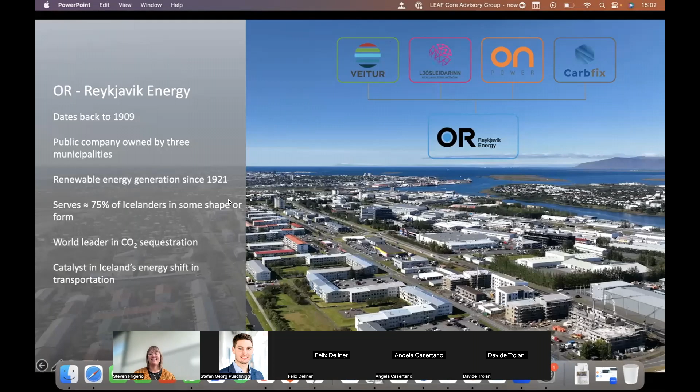Okay, so we connect people and natural resources.

This is just to show the different utilities that we have and the approximate percentage of households served. So we have the water reserves, which is the groundwater, the watershed, and the waterworks and distribution to the homes. It's about 40% of the homes that are served by that.

And as you can see, the blue line continues on through the sewage and out to the ocean. In low temperature geothermal, we have the district heating network serving about 70% of the population, and it goes through the tanks. You've probably seen the tanks below the Pearl, next to the university where we are. And then to heating the homes and industry, and also through the sewage out into the ocean.

In high temperature geothermal, we have the power plants, and they also serve warm water or hot fluid to the district heating network. Hydropower joins in for the electric distribution system. We also have the electric distribution utility, serving about 60% of the population. And last but not least, the fiber optic company, serving 65% of the population.

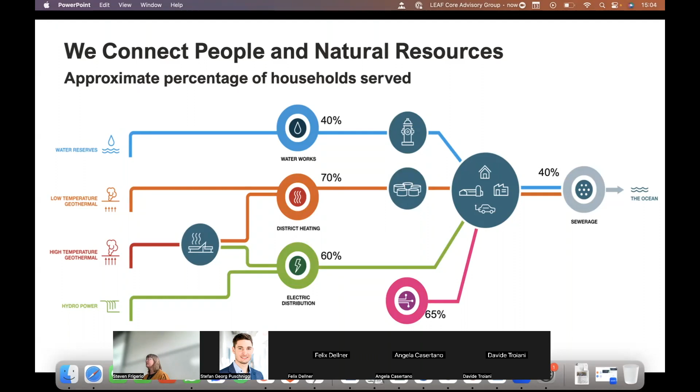Here you see an overview picture of the different systems. The logo marks on the map show where Nesjavellir geothermal power plant and Hellisheiði geothermal power plant are located: 200 megawatt thermal and 300 megawatt electricity in Hellisheiði, 340 megawatt thermal and 120 megawatt electricity in Nesjavellir.

Then we have the district heating network, and there we have 13 separate systems that we are operating, about 10,000 kilometers of pipes. Reykjavik alone has 5,500 liters per second of 84 degree Celsius water. That is, if you recalculate the water to 84 degrees, it's about 5,500 liters per second, or 1 gigawatt thermal.

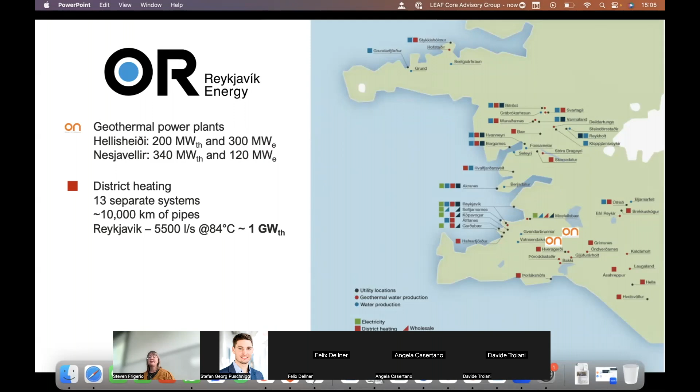And of course, there's also the water distribution system, electricity distribution system, and sewage system. You see the different colors there, and the different colors also within the map, so by that you can see where we are serving what kind of service.

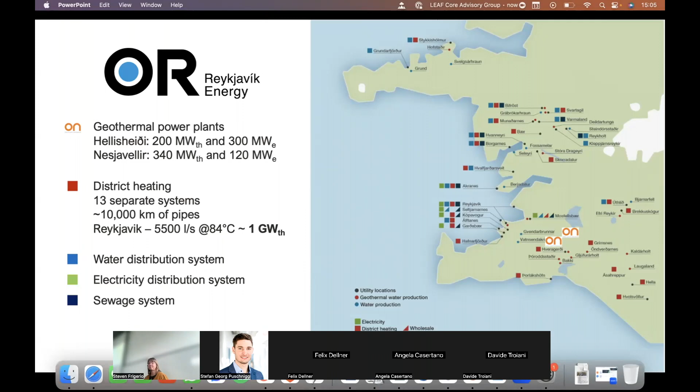So yeah, I'm going to tell you a little bit about the smart meters and how we see the value and the data that it will bring to us. We're currently rolling out the smart meters, and like you saw the map in Lilja's picture, we're not actually capturing the whole area, but this is like where most of the population is.

The green areas are where we've finished replacing the old meters with smart meters, and the rest is going to be finished within the next 2 years. So where we stand in the project right now, in terms of replacing the meters, but we're still not ready with our IT.

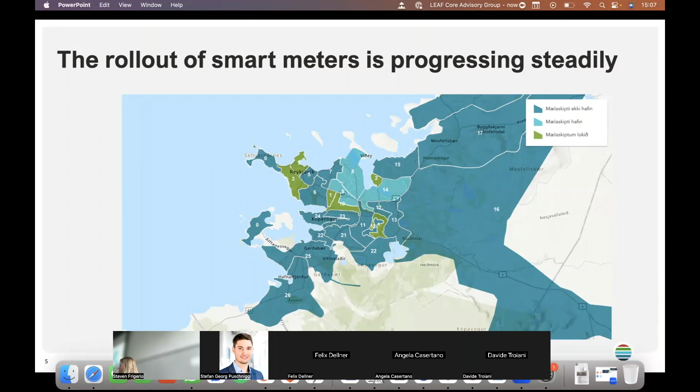The department is basically working on bringing it in-house, the data in real time. Right now we've only been looking at the data with data dumps, but we're super excited, and that's going to happen within the next few months. The timeline is November. So anyway, it's a huge investment, it's a huge project, but we are doing it because we see benefits from it.

And maybe the most obvious benefit for our customers right away is that they will no longer have to submit the readings from the meters to us at least once a year - responsible consumers maybe do it more often. So that's going to be the most obvious change to many to begin with.

But also it's going to change the way we bill our customers. They will be invoiced exactly for what they use each month, instead of the old estimations that we've been using, leading to some corrections at the end of the year. So I think that's going to be a big change.

Also, it creates the opportunity to catch some problems or inconsistencies that you can see in the energy usage, maybe caused by faulty electrical devices. So at the end of the year, you're not going to get a huge bill because you have some problem at your home - you're going to see it right away.

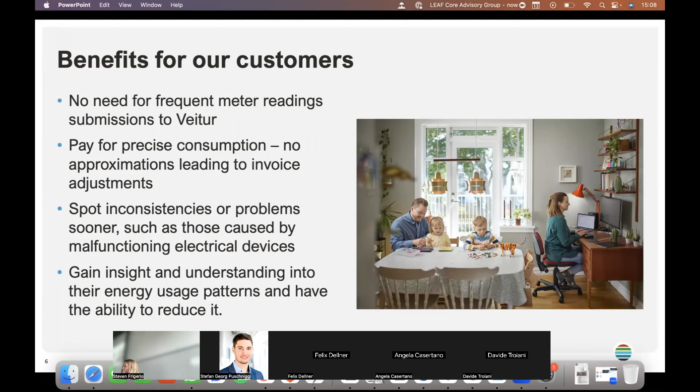But the way we see it, I think the biggest benefit from all of this is that finally our customers will get the opportunity and the tools to really understand how they use their energy. And with that, they can get the ability to change it and change their behavior.

And there are further benefits. Mostly we see that it's going to support our investments, so we can better prioritize the funds that we have to upgrade the system.

With this new data, we're going to get a much clearer picture. During those outages that will, of course, still happen, we foresee that the response is going to be much faster, so we can pinpoint right away and locate where there's a problem. And last but not least, with the smart meter data, we will finally get a very holistic view of the quality of the service we are providing, hopefully a confirmation that we are indeed delivering as we promise.

I'm a woman of simulation models. That's my expertise, and I can proudly say that to realize some of the benefits we hope to get from the smart meter data, we need the simulation models, which we are using currently. But what's going to happen with the smart meter data is that we're going to get much better and more accurate models, and with these models we can get better insights into our systems.

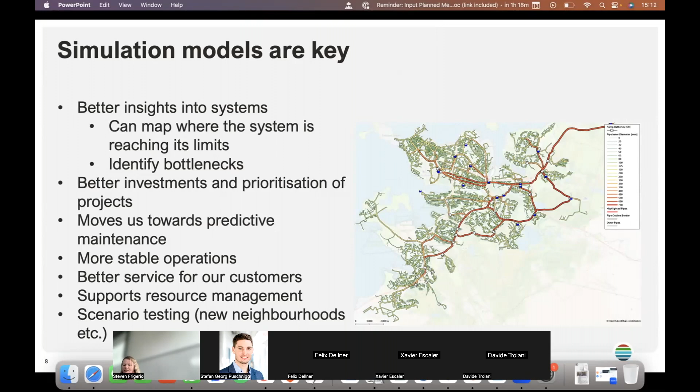With these models, if you have a precise model of your system, you can basically test any scenario you can think of. I'm going to show you one of the bigger projects we've been doing using these simulation models, because we live in a city that is always expanding.

There are many densification areas, putting houses everywhere there is some space, and of course we need to connect these new customers to our systems. These models are helping us enormously to plan ahead, because the city has quite ambitious plans on expanding and getting bigger.

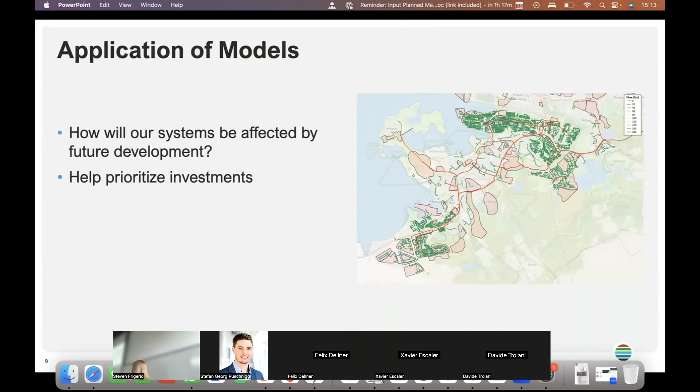So what we did is we went through all the planning data for Reykjavik and the surrounding municipalities, and we located all the new neighborhoods and densification areas of the city. We found out where we're going to be seeing new houses and buildings, and then we converted that into what it means to us, like more demand for electricity, hot water, water, and maybe sewage. But in that system, we're mostly worried about intense rain events.

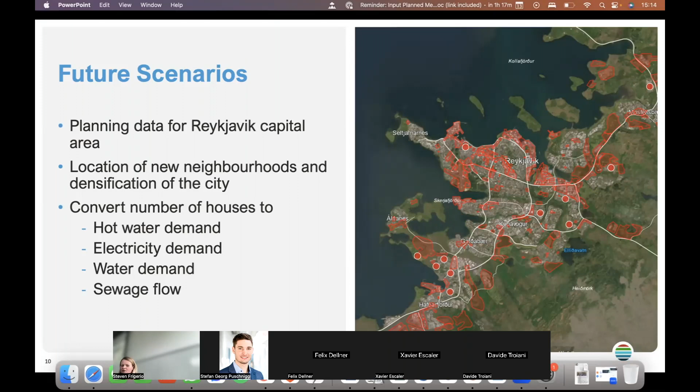So we converted this planning data into the future demand, and we have this planning data like 40 years ahead of us. So with the simulation models, we could have a look and see what's going to happen to our system.

So this is a really nice tool to go into conversation with the municipalities, so we can do this as a team.

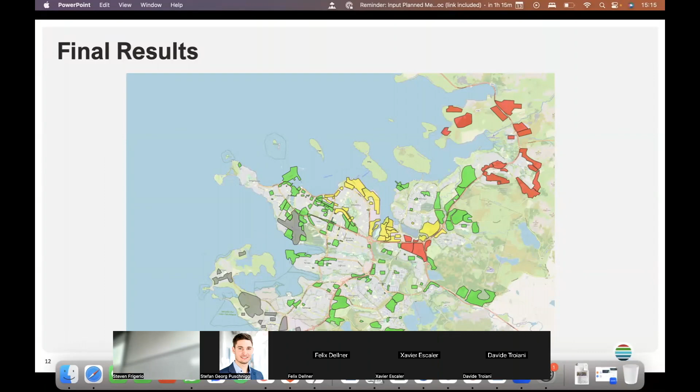And then finally, what I'm super excited about, which is what we're going to do to take these models to the next level, is that we're going to create what we call a digital twin. It's a very much a buzzword these days and everybody has their own definition. Our definition means that it's a real-time model of the system. We've done a small pilot, which we're going to expand during the next weeks.

And when the smart meter data starts rolling in, it's going to be even more reliable. But basically it means that we take the model that we have and connect it with live data, so we can have a look at what's happening in the system at any time.

And this becomes a tool we can deliver to, for instance, our customer call center. Right now they are constantly taking calls - if there's a problem in the system, it's usually the customers who let us know. But we want to be proactive and see things before they happen, before the calls come in, so we could maybe call the customers before. We have very promising results from the pilot, and finally this is also going to be a very useful tool to pinpoint and locate leakages fast.

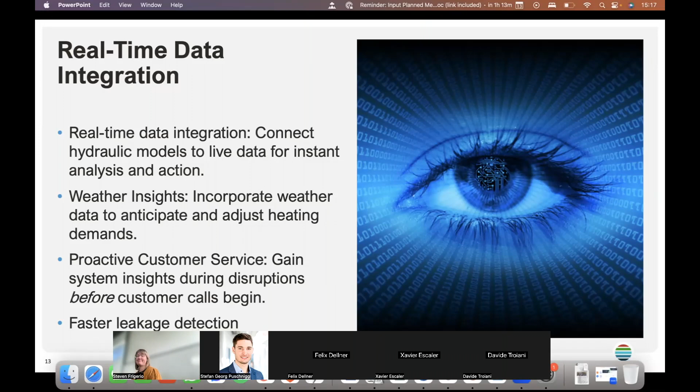And this, of course, sounds like we have the whole world mapped, which is maybe not quite the case. Almost, but almost - so we're heading there. And of course there are some points that we can still improve, and one reason why we are in the H-Hope project is, of course, that.

And we would like to be part of this group that is solving how to meter where we do not have the electricity to meter, for example. And we are now searching for the H-Hope case study within our system.

And we had a lot of discussion with work package leaders within the group on constraints, because of course when you are simulating the real environment within a laboratory environment, you need to have some constraints and some limits. Then after that we had two internal workshops with our main district heating experts and research team that know our system inside and out. And the constraints are not really beneficial for our district heating network, was really the end result.

Because our fluid is hotter than 80 degrees and our pipes are quite slim, we needed to be over 200 millimeters, which they really wanted.

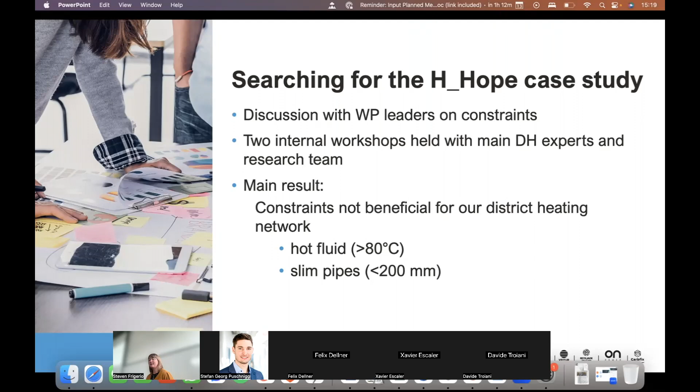But we also continued looking at the system, and this is the system that we are looking at. So water temperature, 80 to 130 degrees, pipe diameter is of course very varying - from 32 to 900 millimeters.

We have the two main veins, so to say, coming from the power plants to the city, from Nesjavellir and Hellisheiði - 24 kilometers of a 900 millimeter pipe with 1500 liters per second from Nesjavellir, and then 19 kilometers of a 900 millimeter pipe with 1050 liters per second. So these are the big veins coming into the city.

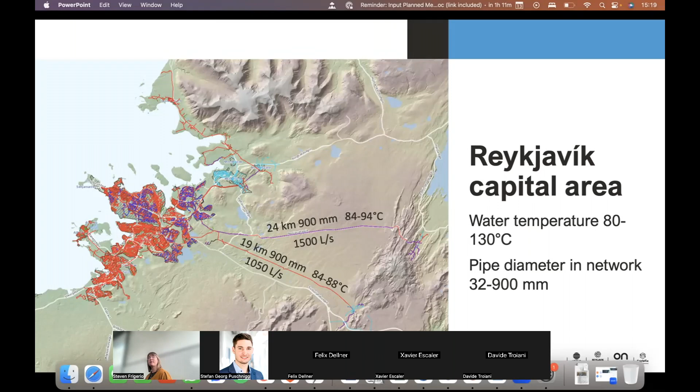And of course that would be the dream, that when we have innovated enough we can have the high temperature solution to have the possibility to also measure them, where today we have to go with meters and measure at specific metering points. But yeah, this is what I was saying.

So most points of interest are well covered at pumping stations, also with access to electricity. And we are undergoing this transition that Sigga described so well, but there the pipes are too slim for the constraints that we were given.

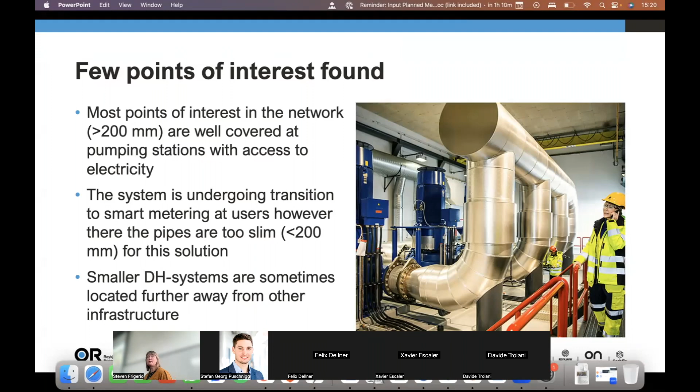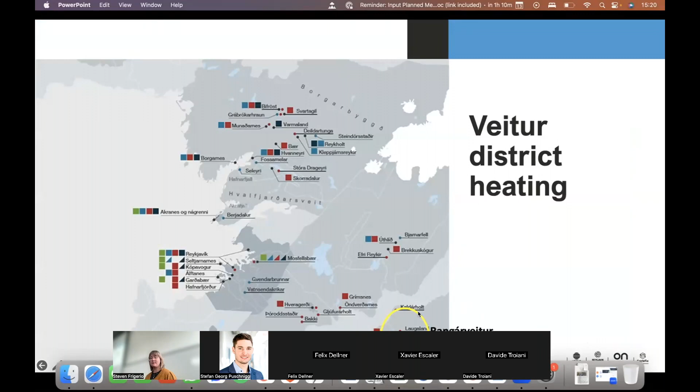But as I showed before, we have more district heating systems than only the capital area, and smaller district heating systems are sometimes located further away from other infrastructure. It cannot be seen because of the border here, but we have a region below that is called Rangárveitur, which is further away from the capital city. But of course it's the midpoint of their world, of course.

And we have Ásaleggur in Rangárveitur, which is a potential point of interest and is the case study that we located as the point of interest for this project, and have provided data from the points where the green arrows are pointing. And the point of interest is where the red arrow is pointing.

So the pipe is 150 millimeters, not quite within the constraints, but as close as we could with the fluid temperature of 65 degrees. There we have the flow rate of 16 to 20 liters per second. And we only have the orifice plate flow meters at the user, so we don't have any data for that point today. If there's a leakage there, we would not know until somebody detected something wrong in the earth or something. So this would be an excellent example of where we could have this kind of metering.

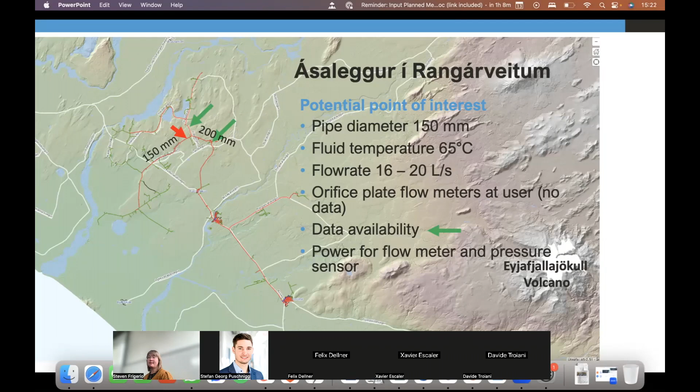Yeah, and then there we would want the power for a flow meter and pressure sensor. So that would be the case study here. But of course, as presented, we don't only have the district heating network, we also have potable water system and sewage system. And within them, we see also further utilization possibilities. So existing springs situated in mountains far from infrastructure.

New springs planned in remote places and pipes under the ocean are examples of places where the groundwater could use some metering. And in the sewage system, we have flow meters and level measurements in the wells, but they are powered by batteries. So that would be also another interesting point.

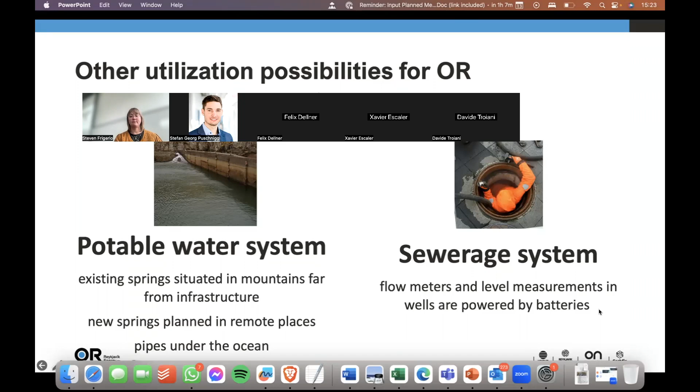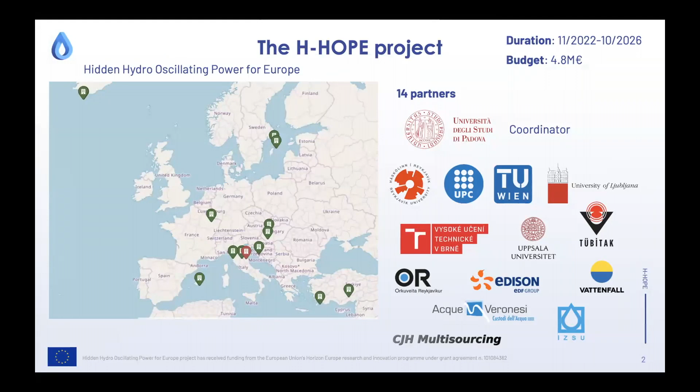Just a few words on the project itself. As you can see, it started in November 2022 with a grant of about 5 million. The consortium is composed of 14 partners, among which there are several universities, but also industries and potential stakeholders. You can find the names over there.

And the main target of the H-HOPE project is to exploit the untapped hydropower potential in natural and artificial water flows. I mean, for example, water distribution network, as we have seen, but also irrigation channels and natural flows like the ones that we have, for example, in the Lagoon of Venice in Italy.

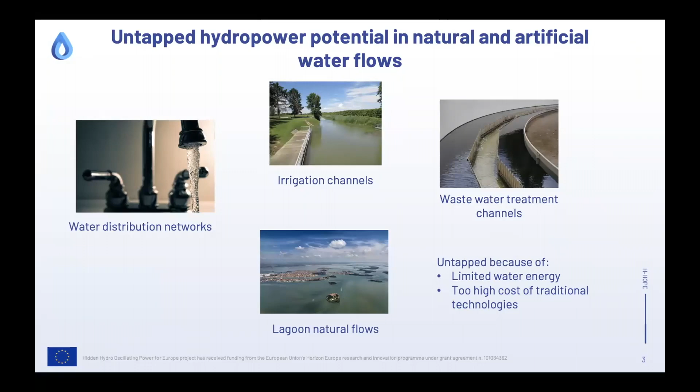This energy is untapped for two main reasons. The first one is that the amount of energy available which can be exploited is limited, and I will show you some data later on. The second aspect is that, because of this limited amount of energy, we cannot use a standard solution like hydraulic turbines, because they cost too much, and this is not sustainable for companies.

So for this reason, we have developed a solution. We are trying to develop an innovative solution whose goal is to be sufficiently efficient, but also low cost. And the concept at the basis of the H-HOPE project is the one that is shown in this figure.

If you immerse a body in a water flow, downstream you create vortexes like the one plotted in this figure. And if these vortexes have the right frequency of shedding and the right intensity, you can produce vibration and forces on the bodies. The result is what we can see in this video: a moving body forced by the water flow, and you can try to extract the energy of the motion of the body. This is the general concept of the H-HOPE project.

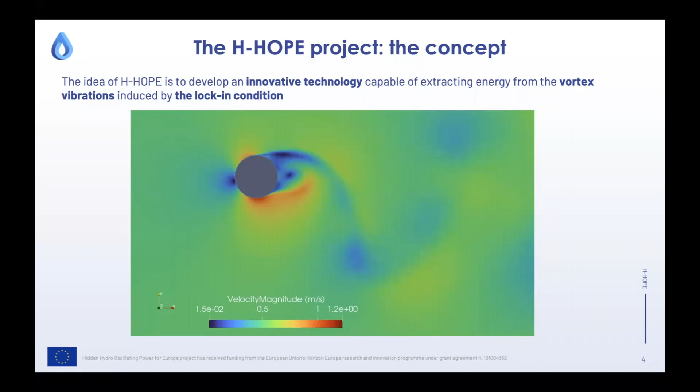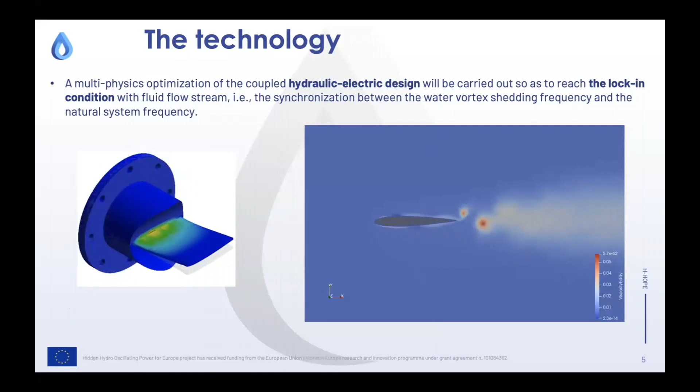Of course, this is complex for several reasons. First of all, we have different application fields, as I mentioned at the beginning of my presentation: water distribution network, wastewater treatment, and natural flows. So we have tried to classify all the possible application fields into three main groups, named piping, open stream, and open channel. Piping is quite easy to understand - we are targeting pipes in hydraulic networks like the ones that we have seen in the presentation before.

Open streams means a situation in which you have a water flow with a specific direction, and you can use also the walls as an installation point for the technology itself. Whereas open channels means a completely open movement of the water, like in natural flows, for example, in the Lagoon of Venice. And for each of these applications, we are trying to identify the most suitable configuration.

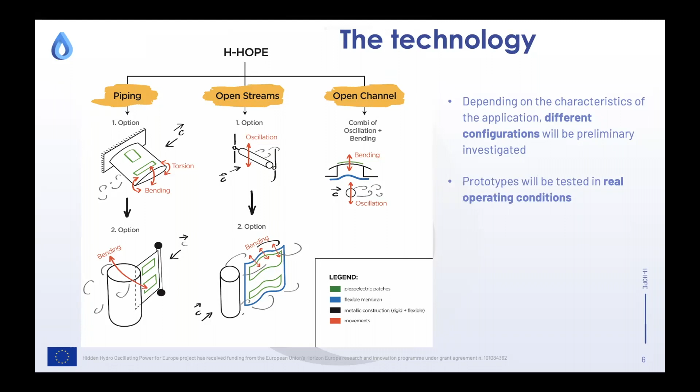There are different options. All these options are under investigation and will be tested in laboratories in real operating conditions. So we need real operating conditions. And for this reason, within our project, we have several case studies which provided us a lot of data.

We have 4 distribution networks in Italy, Austria, Spain, and moreover. We have 1 hot water distribution network, and we have just seen it. And then we have 1 wastewater treatment in Italy, 2 open channel application case studies, and 1 lagoon. Of course, the Lagoon of Venice.

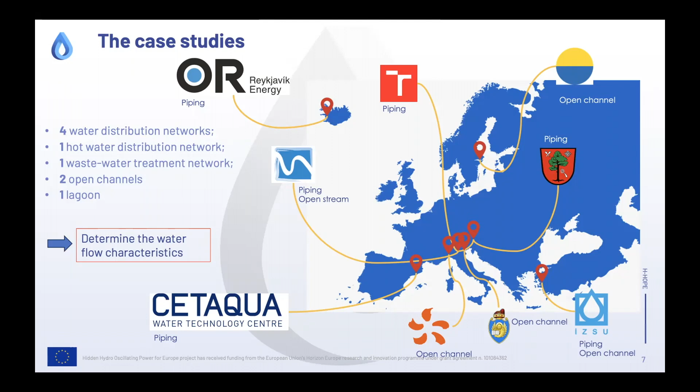One of our activities is to collect as much data as possible from these case studies in order to define the boundary conditions in which our technology will be required to operate. Here are just some examples of the data we have already collected.

For example, in the case of the piping application, we have seen that on average the water flow velocity is between 0.4 and 2 meters per second. We can have different diameters of the pipes. As we have seen, we can go from 200 millimeters up to 2.5 meters of diameter, depending on the application, on the position within the networks.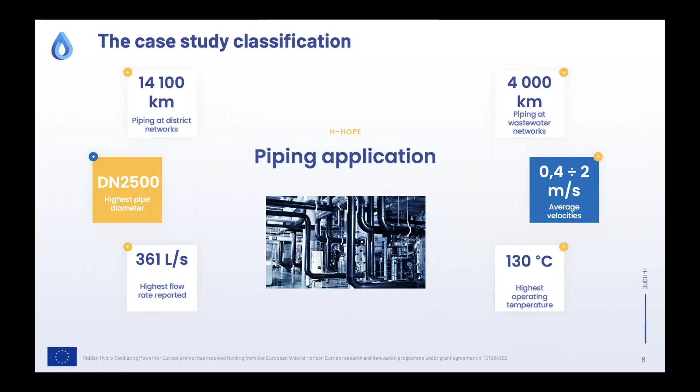There are also challenging operating conditions like the temperature. For example, in the hot water district heating networks, we have an average of 130 degrees, which can pose technical problems like the glue of the patches suffering at the high temperature of the water. So we need this data because it provides us the right technical constraints and drives the research activities in the right direction to make the solution feasible and properly designed for the different application fields.

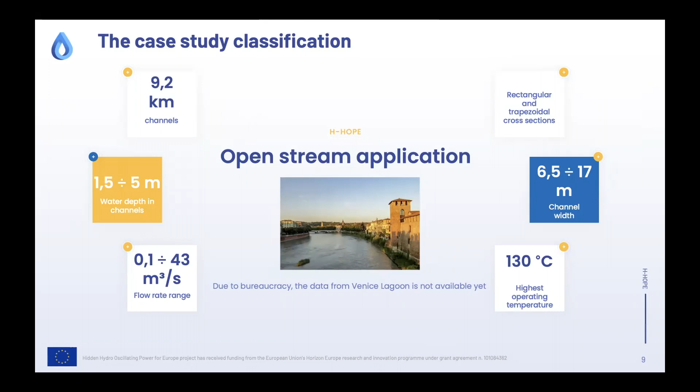Here, some other data about the open stream case studies. As you can see, velocities are changing a bit, dimensions are changing, and dimension is an important constraint because we have moving bodies, and the space around the bodies can create a constraint. In a pipe with 200 millimeters of diameter, the allowed movement of the body is limited because you cannot hit the walls of the pipe. So these are constraints that have to be considered during the design and development of the technology.

Last but not least, open channel application increases a lot the available space. For example, we have ranges going from 6.4 up to 17 meters, which is good in terms of oscillation, but can pose problems in terms of water direction because not always do you know the direction of the water, and you need to develop something that can adapt to a variable direction, not only to a variable water velocity.

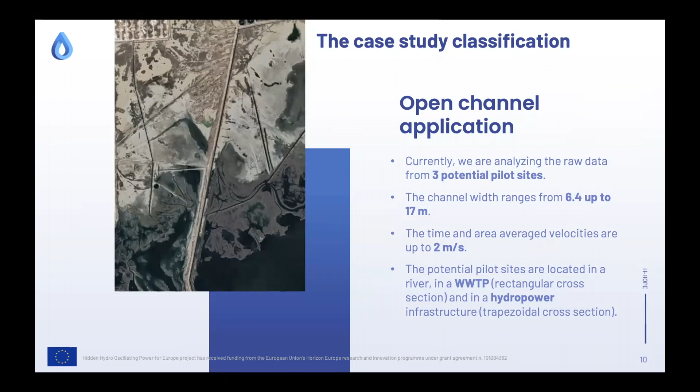So our goal is to produce energy. And to do this, we have to obtain a significant movement of the body. But this movement is obtained only if we are capable of achieving the so-called lock-in condition. The lock-in condition is a phenomenon in which the vibration induced by the water flows, by the vortexes that I have shown before, are perfectly synchronized with the natural frequencies of the body itself, so the natural vibrational modes of the body itself.

You have to synchronize these two behaviors, and you have to synchronize these two elements also with the control system having its own damping factors and its own influence on the system itself. And this is challenging, and it requires a design which is perfectly customized to the water flow characteristics.

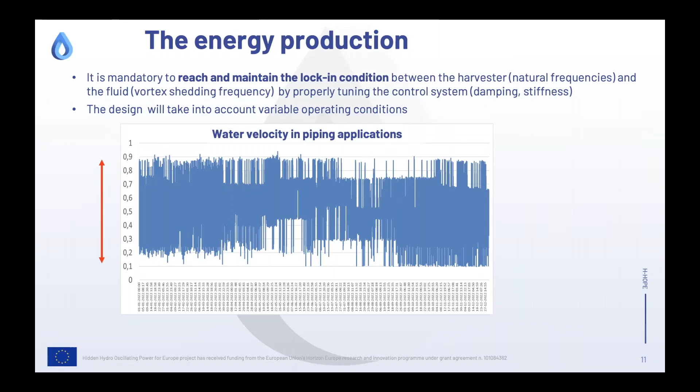This is challenging because we have to find the proper design, the optimal design, to try to maximize energy production. But we have to be aware that our technology will not be able to produce electricity all the time. There will be instants, maybe minutes, in which we will produce energy, and other time ranges in which production will be zero.

We are doing our best to improve this behavior. For example, in terms of control system, we are developing a maximum power point tracking solution, which adapts the damping factor of the control system in order to follow the water flow velocity and adapt the control system to the new operating condition. This allows us to produce energy for a longer period, but we are not fully aware now of how long this period can be. We are studying this.

And the last challenge is the amount of power. If you look at this graph, with the maximum velocity, in this case 0.9 meters per second, a rough estimation of the ideal power that can be extracted from the water is 140 watts. So we are not producing really renewable energy.

This is not our goal. We want to try to extract a little bit of that power in order to feed sensors, to support digitalization of the networks and the case studies under investigation. And we have to be aware and fair from the very beginning that, for example in this case, 140 watts is totally unrealistic. We cannot extract all that amount of power.

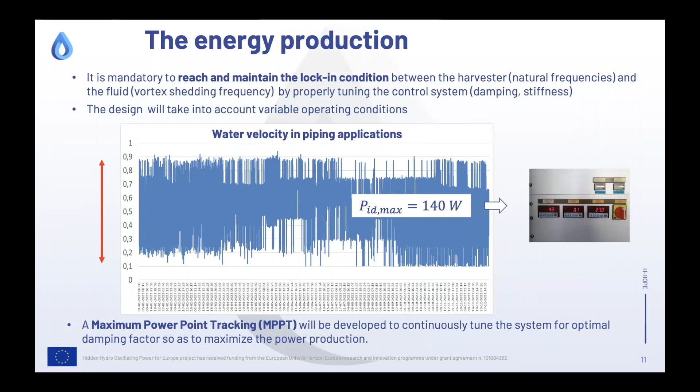The final goal of the project is to make cities and networks more resilient and more environmentally friendly. So we are also, in parallel, carrying out activities in order to assess the environmental impact of our solution, the holistic sustainability of the solution - not only the ecological sustainability, but also the technical and economical sustainability.

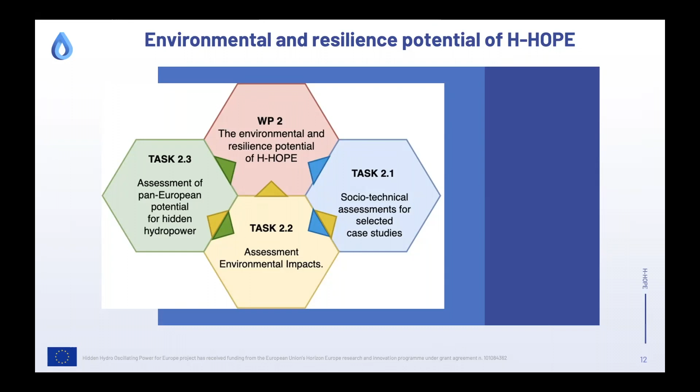And to do this, again, we need your feedback. We need information from you about what can also be considered sustainable from an economic point of view, in order to have a range of potential cost for our technology to make it sustainable.

So we are using the knowledge of our partners. A lot of meetings are ongoing with the companies involved within the consortium in order to understand their needs, their expectations, and all the information they can provide us. But we also need to engage stakeholders, because we need their feedback and their data according to the things I was saying before.

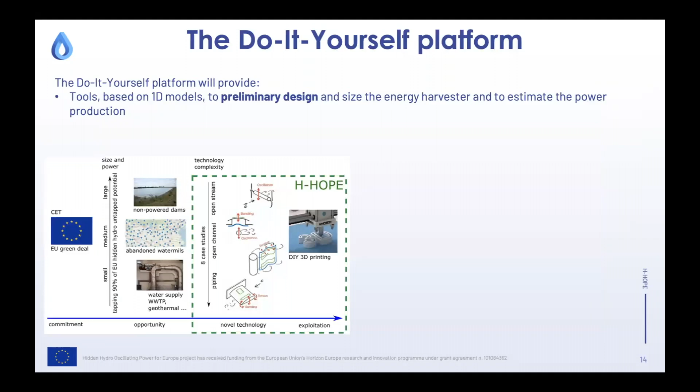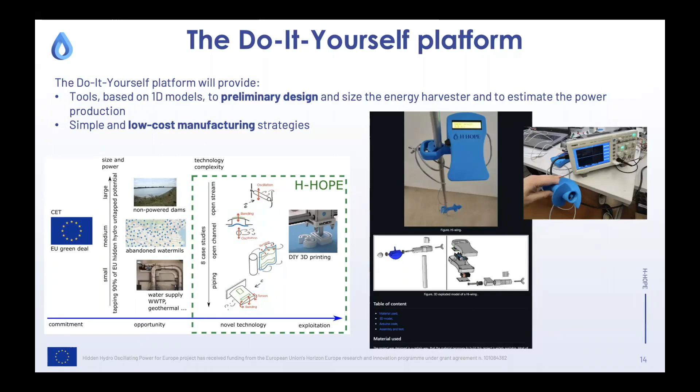Last but not least, cost is important, as I said. So we are also investigating a low-cost manufacturing solution. One purpose is also to develop what we call the do-it-yourself platform - a platform in which even a smart member of society can find enough information to manufacture, maybe in a rough way, their own device, perhaps to install in the irrigation channel passing through their garden, just to produce a little bit of energy for lighting up the garden. But this is the purpose: to maintain the cost low in order to make it sustainable for companies, but also for the general society. And this is all.